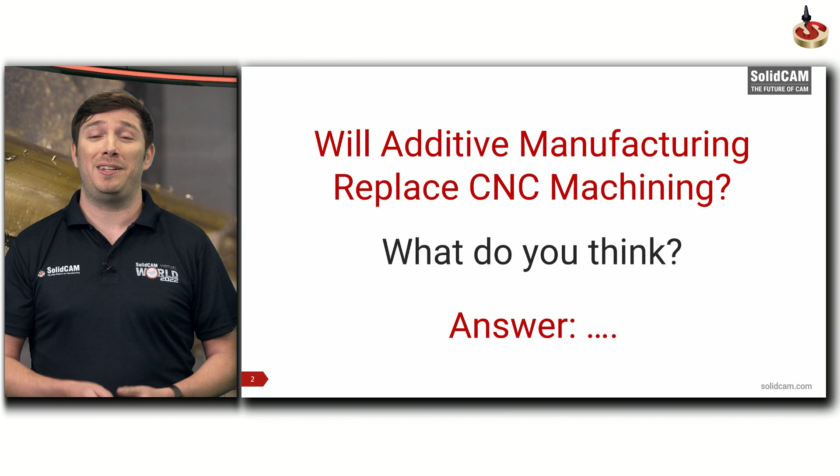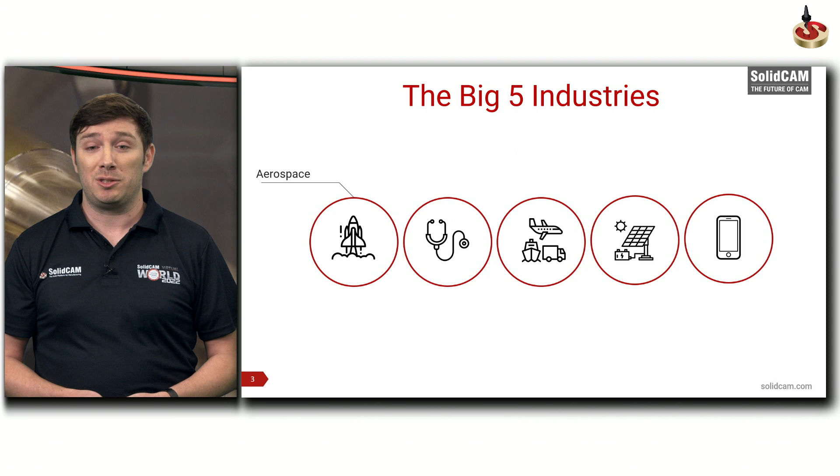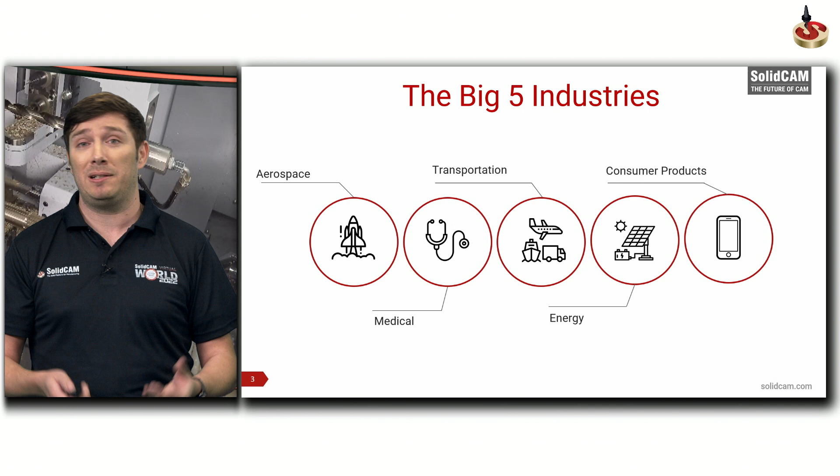There are 5 big industries where 3D printing has become indispensable, starting with aerospace, then medical, transportation, energy, and at the end consumer products. Probably all of us had something 3D printed in our hands already. For example, in the transportation segment, airplane parts are already 3D printed. The same in the consumer products market, and also medical devices are already printed, which is really interesting.

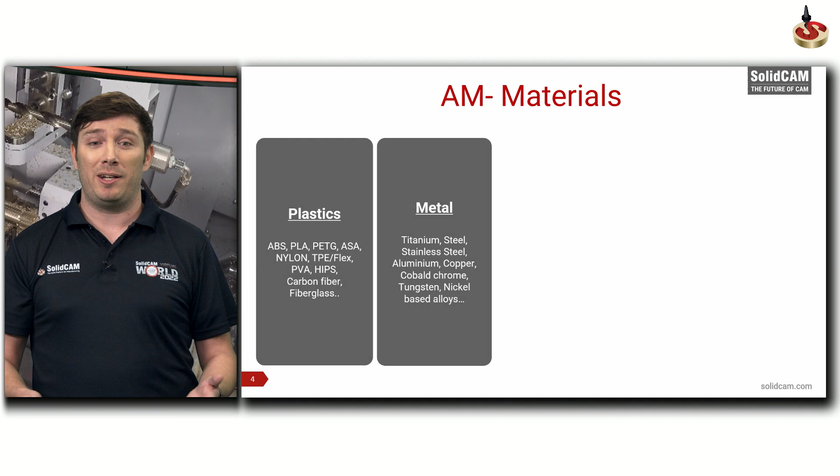Let's talk about the different materials that can be printed today, starting with plastics - ABS, PLA, PETG, probably all the materials you guys use at home with a small 3D printer, like a do-it-yourself kit or something like this. But there are also more advanced materials like carbon fiber and fiberglass.

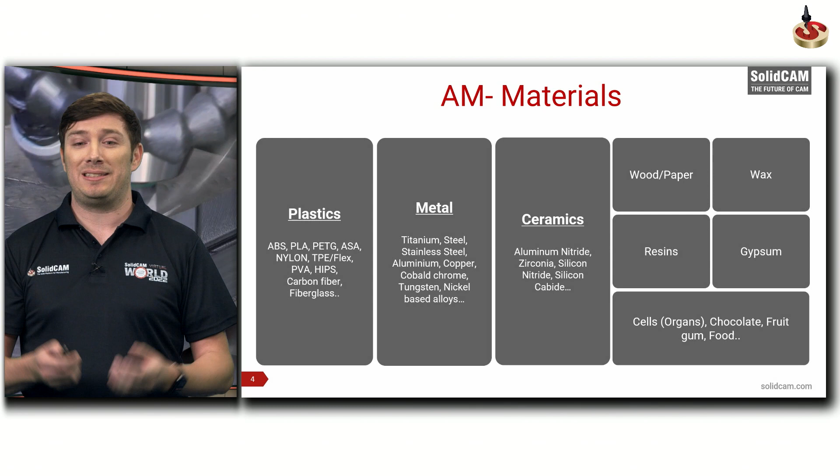Going to the second point, I would like to talk about metal. And yes, metal is printed today, and it's a really easy process. We can print titanium, stainless steel, aluminum, tungsten, whatever you name it. And there will be a lot more materials added soon in this whole process.

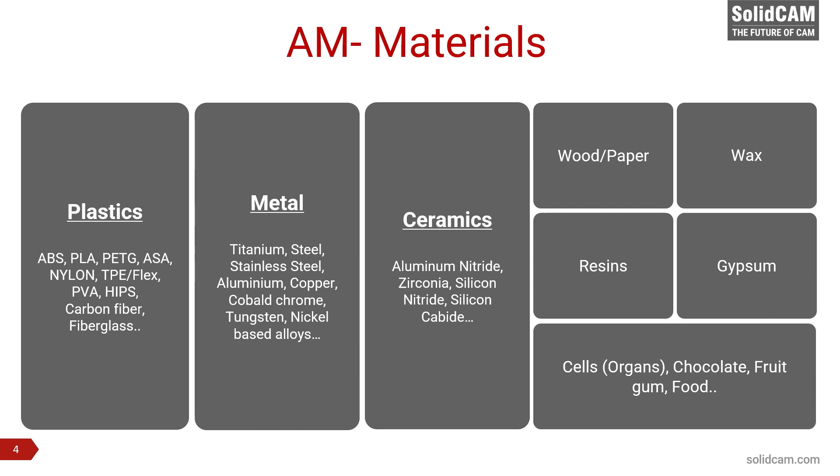Then of course ceramics can be printed. Then we can print wood, and yes it's true, wood is printable those days. Of course there is paper, wax, resins, gypsum, and also cells - I mean they even printed organs. Most importantly, it's also possible to print chocolate, so also fruit gums and general food can be printed.

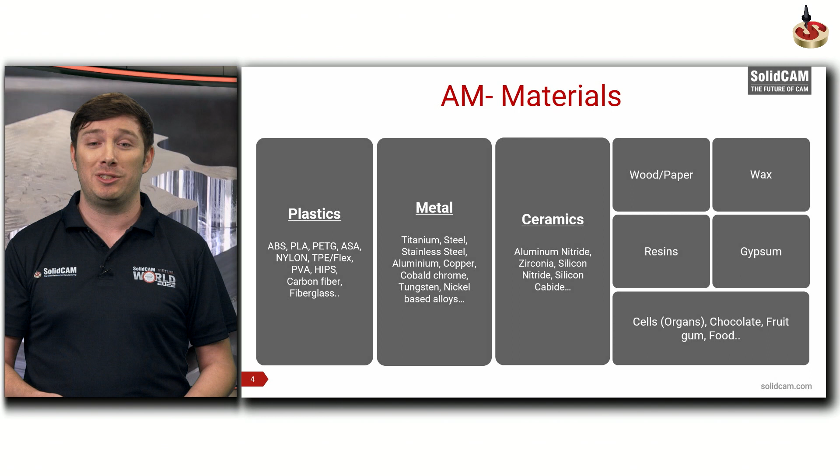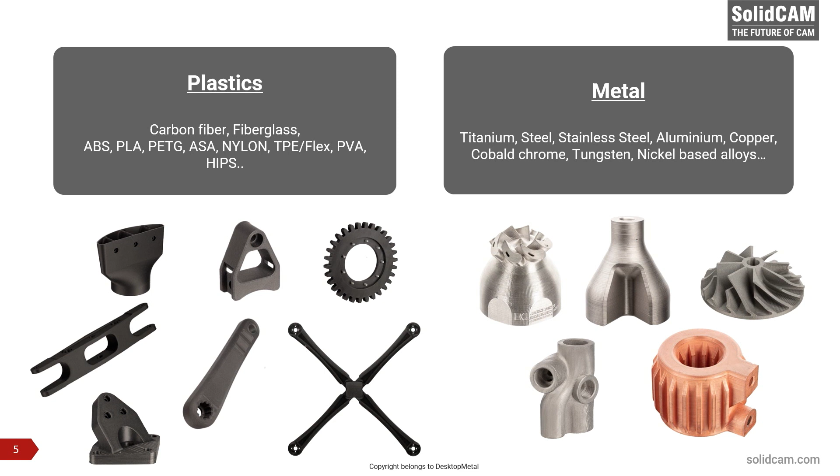But today, obviously, we are going to focus on materials used in the industry we are in: plastics and metal. On the left side you can see plastics, an example of printed plastic parts, especially carbon fiber parts. What you can see here in the middle is, for example, a crank for a bike, for a bicycle - you really get the feeling that these materials are strong, sturdy, and you cannot break them easily. The X-shaped thing you see is the base plate for a drone, for a quadrocopter.

Talking about metal, it gets even more interesting. The first part here in the left corner is a heat exchanger, distributing heat through inner channels. To be honest, to machine a part like this is not easy - you need to split the part into 3 or 4 parts and machine the inner channels. The same applies to the copper part you can see at the bottom right corner.

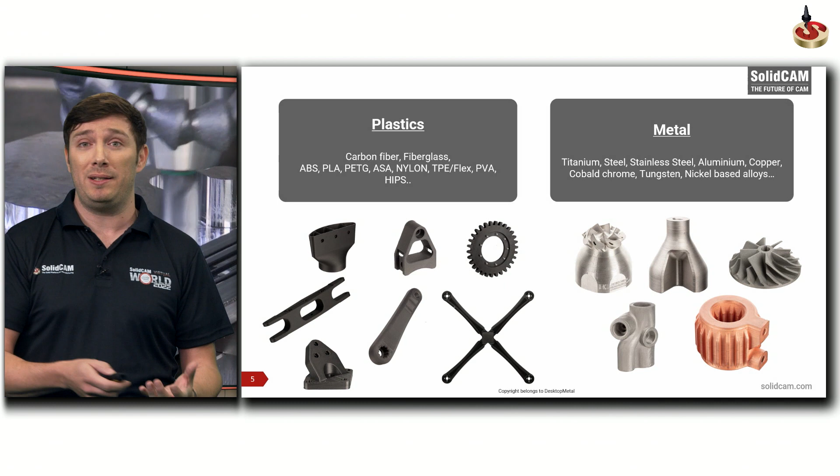It is a heat exchanger, built on a rod, and there are inner channels so water is circling through it - also no way to machine it in a conventional way like we all know it. Of course you can see an impeller as well, so you can actually save a lot of roughing time because the part has been printed previously.

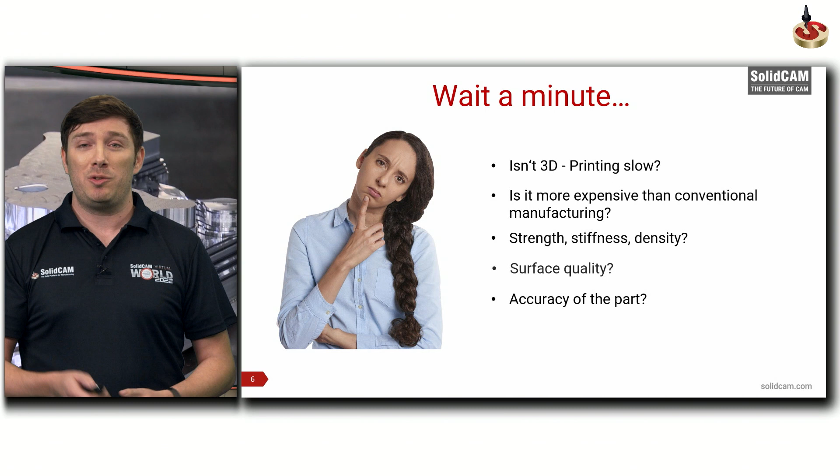But all the machinists out there are going to ask me, 'wait a minute Michael, isn't 3D printing slow? Isn't it more expensive than conventional machining? How about the strength, density, surface quality, and above all the accuracy of the part?' Those questions I would like to answer during the next slides.

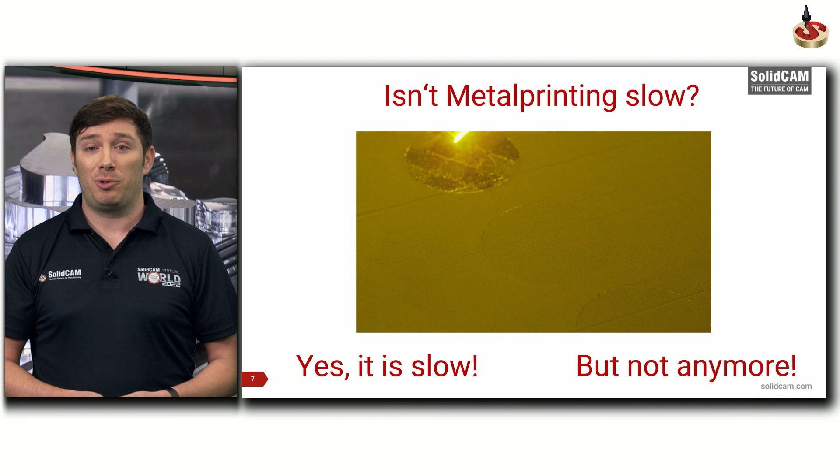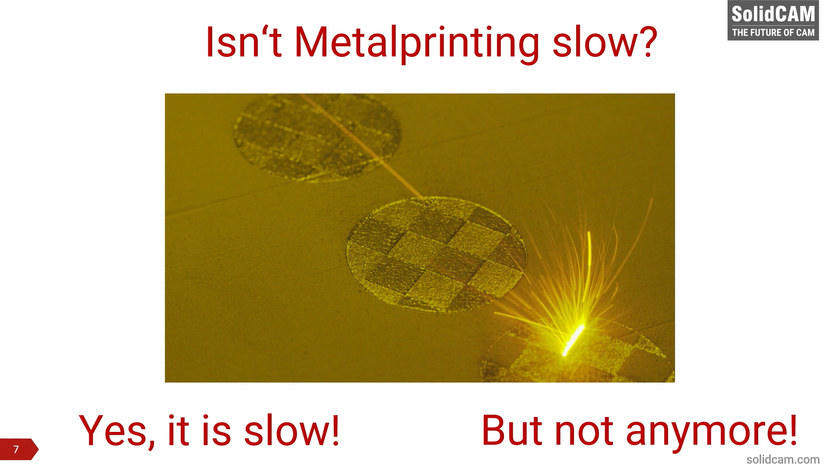The first question was, isn't metal printing slow? We see here a laser sinter process, and I'm going to start the video now. There is a fine bed of metal powder, and a high capacity laser melting this powder exactly at the position where the contour of the part is. Now we see another layer of metal powder being put on the first layer, which has already been sintered. This happens again and again, thousands of times, until the part is finally done. So there is the second layer, then we see the laser again, and as I mentioned, it's going to repeat over and over again.

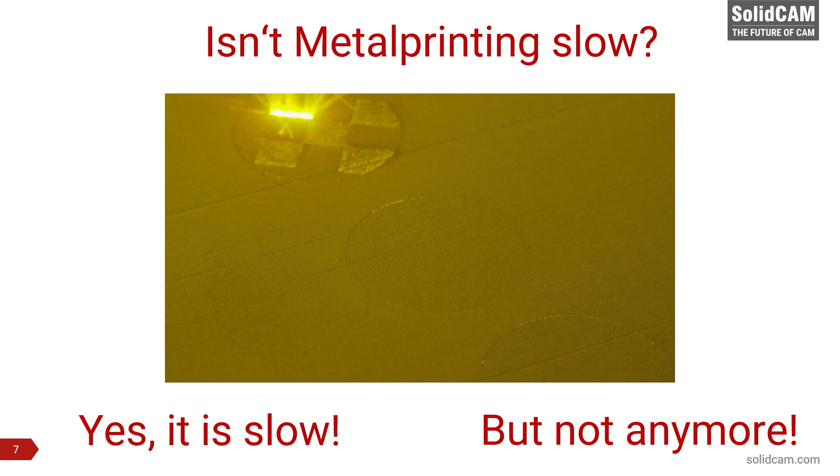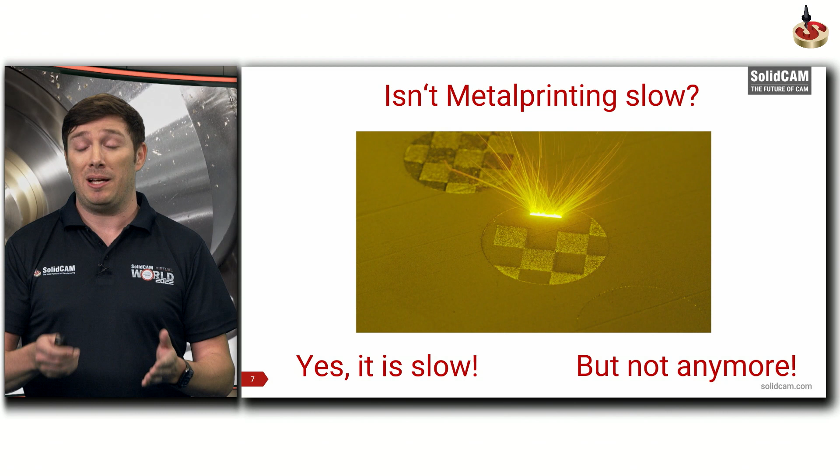So isn't metal printing slow? Yes, it is slow, but not anymore. There are technologies out there that are going to speed up this process tremendously.

And this is where I would like to introduce SolidCAM additive manufacturing. I'm actually really proud to introduce it to all of you. So what we're going to do now is combine the strengths that we have in the CAM industry with a really famous reseller and manufacturer of 3D printers, called Desktop Metal.

The headquarters is in Burlington, Massachusetts, and as I mentioned earlier, they are inventing and manufacturing those 3D printers. They claim that they exist to make 3D printing accessible for engineers, designers, and manufacturers. And it is a good thing that our customers are exactly the targeted group of those 3D printers.

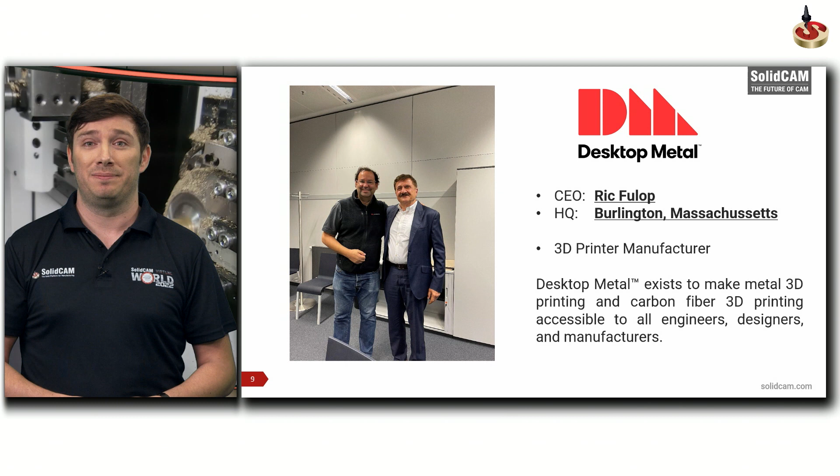So let's talk about this special process that I mentioned earlier. It's called binder jetting, and this is exactly the technology that makes the slow metal printing we have seen previously faster. And it's not just faster, it is a lot faster, it is enormous.

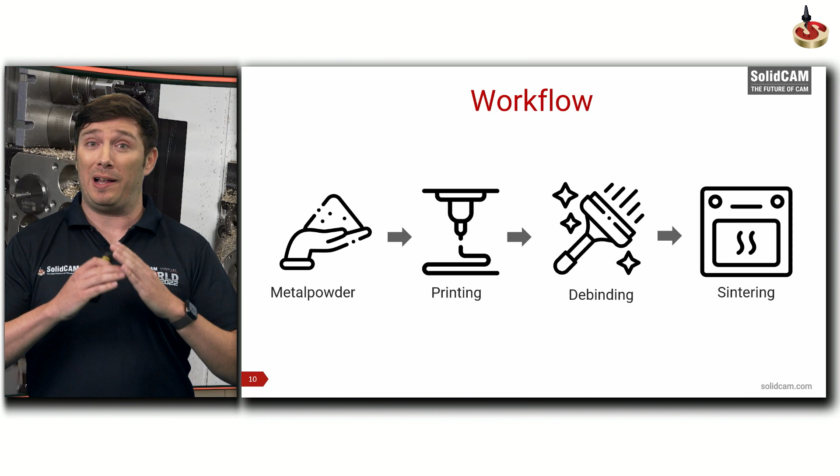So we start with fine metal powder. We are going to print it, then there is a debinding step where we get rid of all the excess material, and then there is sintering.

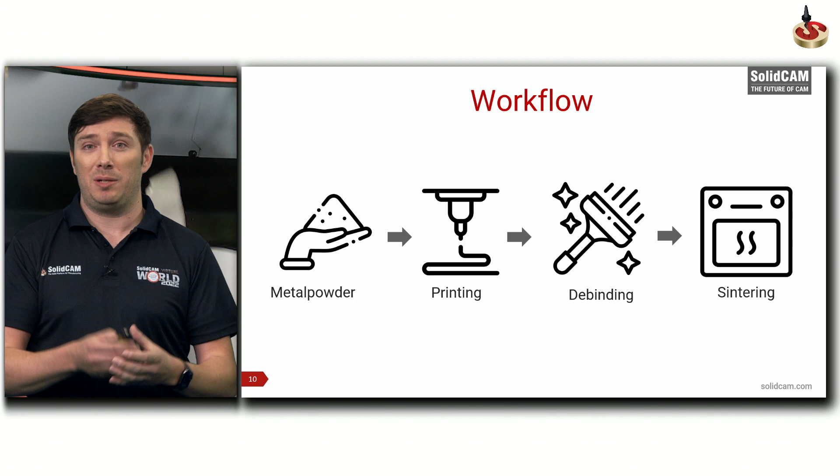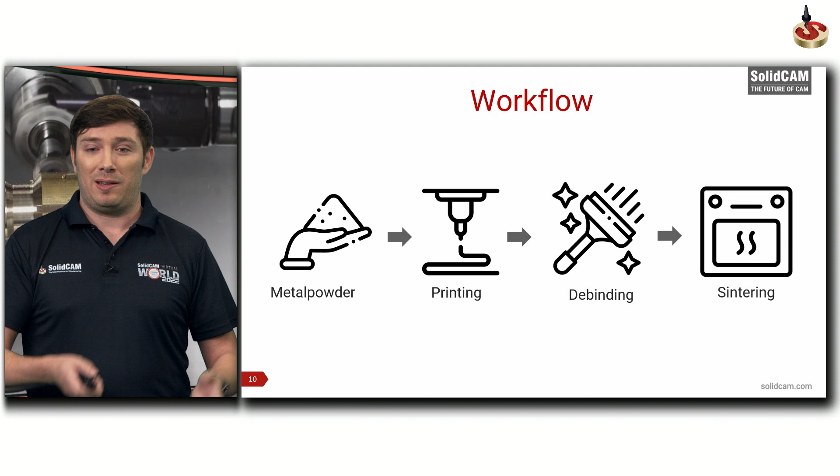What we have seen earlier is sintering directly on the 3D printer. Now there is the big change. We're taking the parts out of the 3D printer and putting them in batches in the sintering oven, so the next part can be printed simultaneously at the printer. It's called a batch process, and this allows the 3D printer to work all the time producing new parts, while simultaneously the sintering furnace sinters the parts that need to be sintered.

What we have now in our technology center in Schramberg, Germany, is a so-called Desktop Metal Studio System, and it's the first metal printing system that is, I would say, office-friendly. So you can place it inside your office.

On the left side you can see the actual printer. It's a standard printer like you know from home, but these printers are able to print metal. On the right side you can see the furnace. It's also pretty small, you can fit it through a door. This shows that this whole technology has reached a point where it's really usable and easy to use out there.

Example parts we see here are some parts for engines, impellers, heat exchangers, some clamps for clamping, for example, and also jewelry can be printed in this printer.

There is a nice video I would like to show because it really indicates how easy this process actually is. Enjoy.

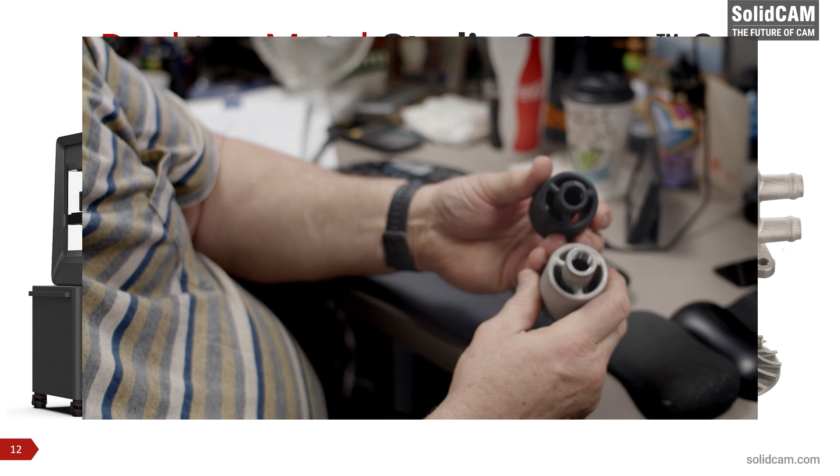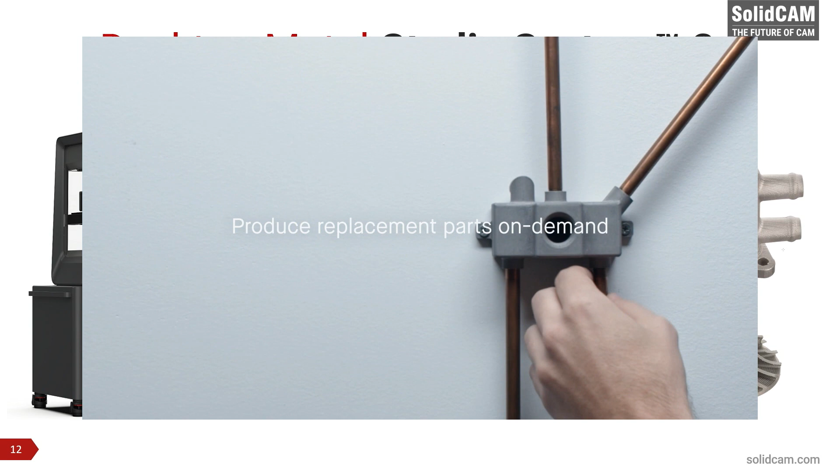So I want to repeat, it is the easiest possible process you can have, and especially, for example, for educational institutes, for spare parts, this printer is meant to produce metal parts, not in big batches, just one part at a time, and you're going to sinter it, and you have the full metal part ready at your office.

And there is another interesting video which showcases the process of binder jetting and the Desktop Metal Shop System in the best possible way.

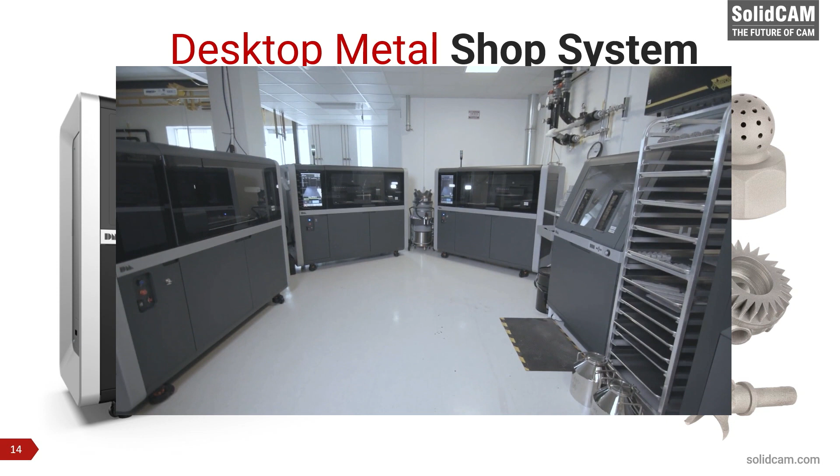You are now in the shop lab. The shop lab is designed to be a mini factory to continuously exercise the shop system, printing hundreds of parts a day for ourselves and for our customers.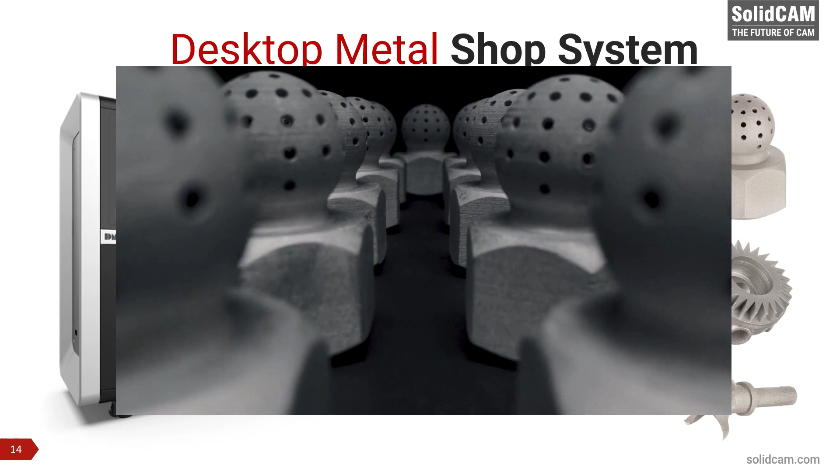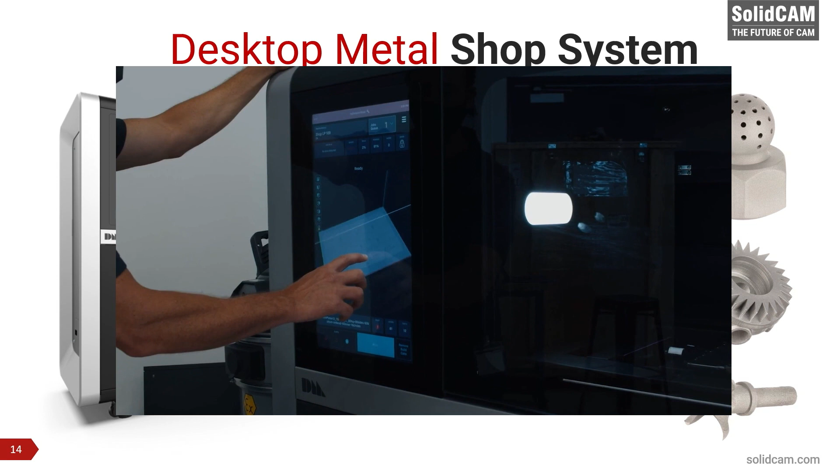So the shop system is the first metal 3D printer designed specifically for machine shops, allowing shops to enter into additive metal manufacturing like never before. The shop system is a single-pass, high-resolution metal binder jetting system at a price point that has never been achieved before. The shop system is an extremely easy system for machine shops to learn to use.

Powder is loaded into the printer, and the printer autonomously lays down 50 to 100 micron layers of metal powder and prints batches of parts. The customer can load as many different parts as they would like into that batch, and it does not change the time. The printer then ejects that batch of parts, which can move on to the next station, and the printer can begin another batch of parts.

The next step in the shop system is the depowder station. The shop system is a batch process, which means a batch of parts can be printed, and then that batch can be moved on to the depowder station, so another batch can then be printed at the same time.

The depowder station is a fully integrated depowdering station where parts can be excavated from the powder, and that powder can be fully recovered in the integrated recovery system. Those parts, once excavated, can be placed directly into the Desktop Metal furnace for full sintering.

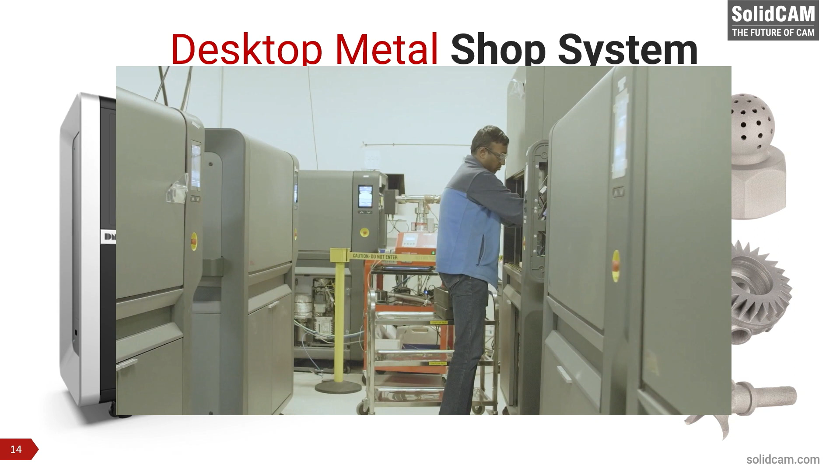Sintering technology has evolved over the years to be huge furnaces that cost hundreds of thousands of dollars and take up entire rooms like this. But what we've been able to do here at Desktop Metal is shrink down that same technology into a small furnace that is vacuum capable, partial pressure capable, and can roll through a door.

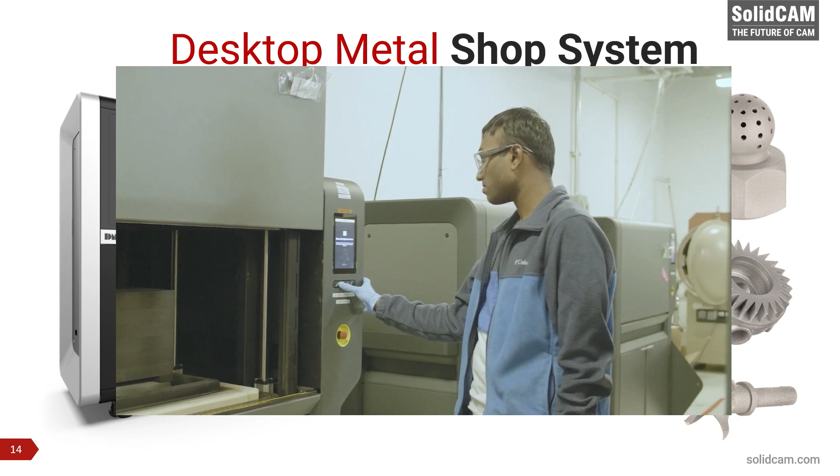And the shop system is designed to scale manufacturing from small scale to medium scale to enhance a machine shop, whether it's an external machine shop or an internal machine shop, with 3D printing capability.

All right, so this was a really, really good explanation of the binder jetting process. So it is easy to use. It is specifically meant for machine shops. It's got a great form factor. You can put it in any small space you have in your machine shop, so absolutely great product.

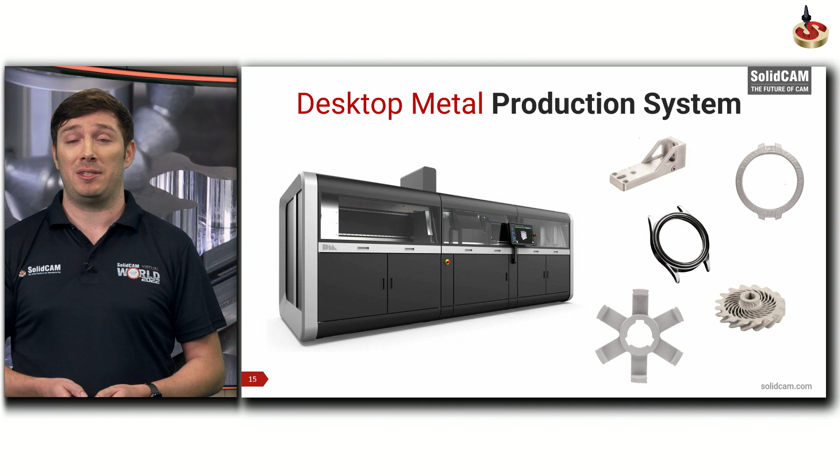If we talk about mass production of parts, there is even one more thing that we can talk about. It is the production system, and it is when you have to print millions of parts a year. This is where the production system comes in. The most affordable one, though, is the Desktop Metal Fiber solution.

As I mentioned earlier, carbon fiber is a really, really strong material. You can print parts that are really, really stiff. And not just prototyping, but also some small batches you can print with these printers. So it's a really great product as well.

So being a machinist, I would ask a specific question to myself. What about surface quality? What about tight tolerances? Let's use this part as an example part. For example, we have your precise hole that obviously cannot be printed.

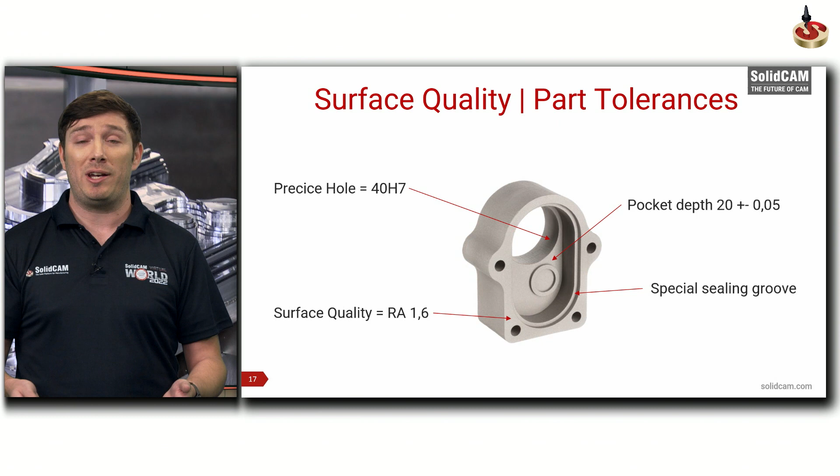We have a really tight tolerance in the pocket depths. Maybe we have a special surface quality, so you have to do a finish cut on it, or a special sealing groove that needs to be machined. So what happens then? Well, it's easy for us. We are going to add one crucial thing to this workflow we have seen earlier. And of course, it is machining.

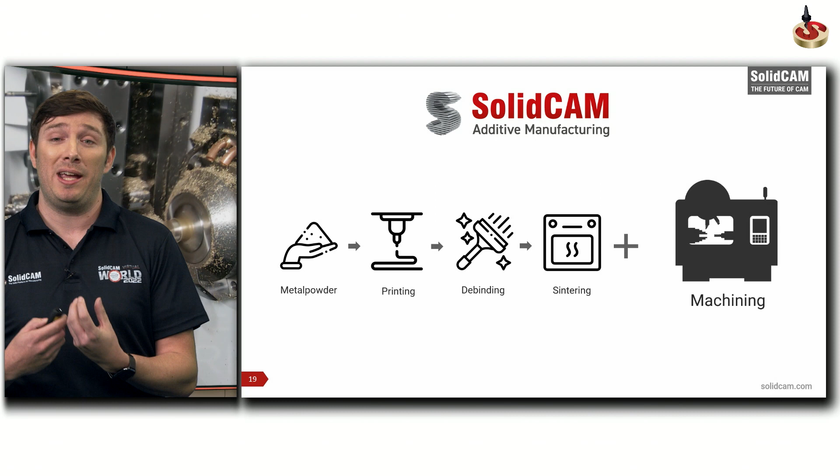As you all know, we are the experts in machining, and we are putting all the knowledge we have into this workflow, and this is what we call SolidCAM additive manufacturing. Because talking about all the customers we have worldwide, we're talking about 23,300 seats. We have 62,000 educational seats out there.

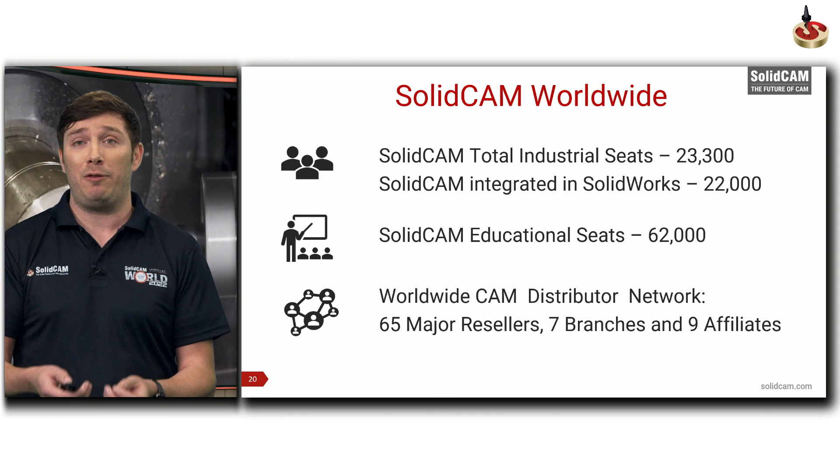So there is a lot of potential out there, because all the customers today, they have to get in touch with additive manufacturing, because in the future, if a machine shop does not know how to print parts, they can't be competitive anymore. So we have to help our customers that are obviously directly placed inside these important markets that I have shown at the start of this presentation.

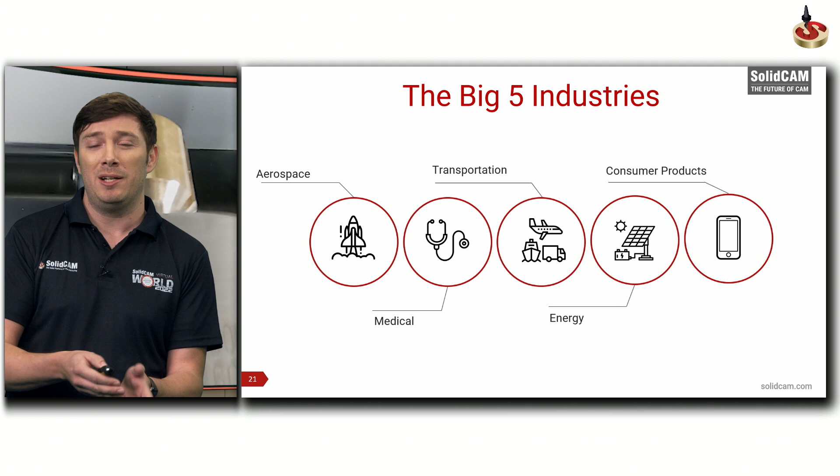So we know the customers, and they already know us. They know we are not just selling a product, we are also offering the best possible support. And we are going to help our customers transform to the future in additive manufacturing.

So we always call ourselves the solid platform for manufacturing. And I will put another thing in it now, which is called SolidCAM Additive. And I think it's the perfect combination for our solid platform for manufacturing.

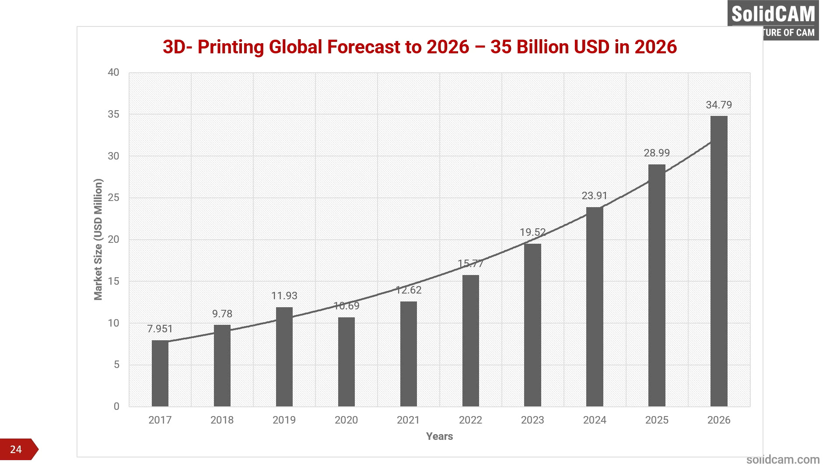Talking about numbers, the 3D printing global forecast is really interesting. Until the year 2026, we estimate a market size of $35 billion US. And as I mentioned earlier, our customers need to invest in 3D printers, or let's say in additive manufacturing in the future, so we have to help them making this transition.

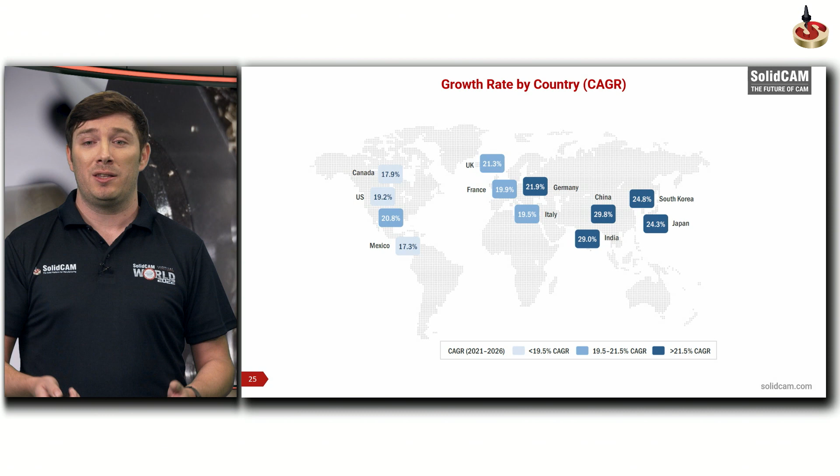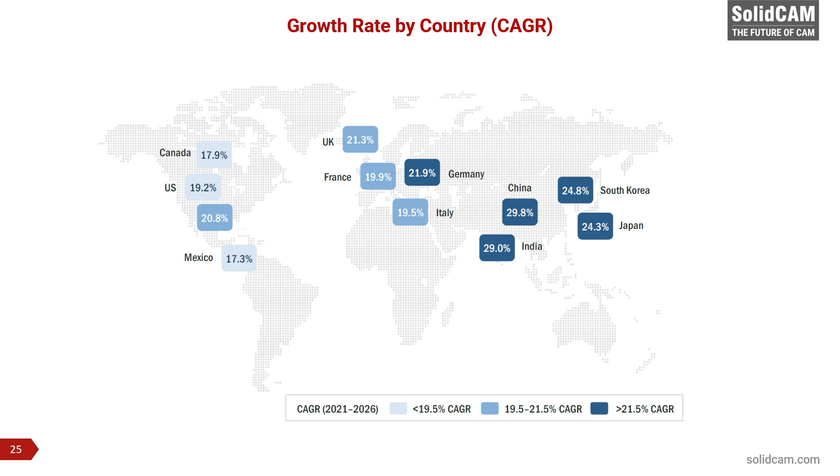Talking about different markets, the compound annual growth rate in different countries is really interesting. For example, I'm from Germany, we have a 22% annual growth rate, and comparing it to Asia, there's a little bit more potential there. And also in the US, we have about 20% growth rate yearly, which is really interesting.

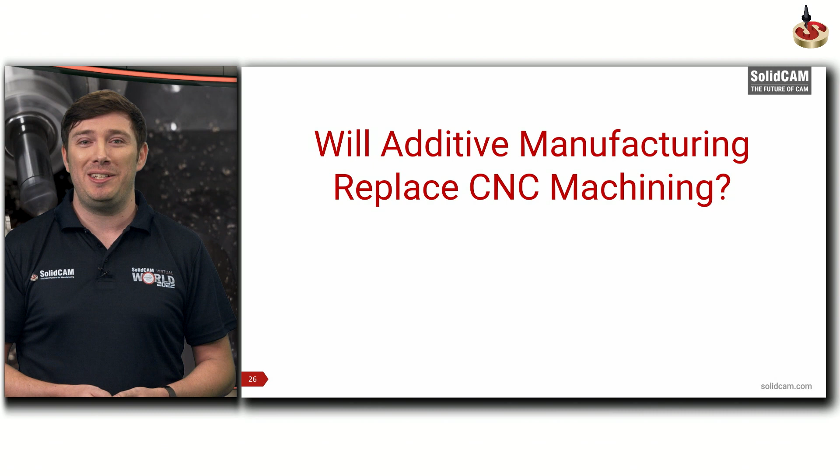So I want to ask you this one question one more time. Do you really think that additive manufacturing is going to replace CNC machining? Obviously, no. It completes it.

Summary, of course. So we are going to act as a reseller of Desktop Metal products starting actually now. We are going to not just sell them, we are going to offer solutions to our customers, because we always say we're not just selling products, we also give the best possible support with the best possible team out there.

We want to close the gap between additive manufacturing and CNC machining. And of course, we're doing all the necessary stuff that is coming with it. We're doing installations, we do maintenance, we do everything needed so our customers can use those Desktop Metal printers in a productive environment. So I really would say that SolidCAM Additive is the best solution for additive manufacturing, especially for customers in our CNC machine shops.

We are going to start in Germany, obviously then we are going to transfer to the US, then in India, and at the end in Israel. And of course, there will be a lot more countries in the future.

So at the end, I want to end with one of my favorite sentences. It's success is best when it's shared. So let's share the success we see in additive manufacturing with our existing customers, and let's transform the machining world into the future together. Thank you very much.